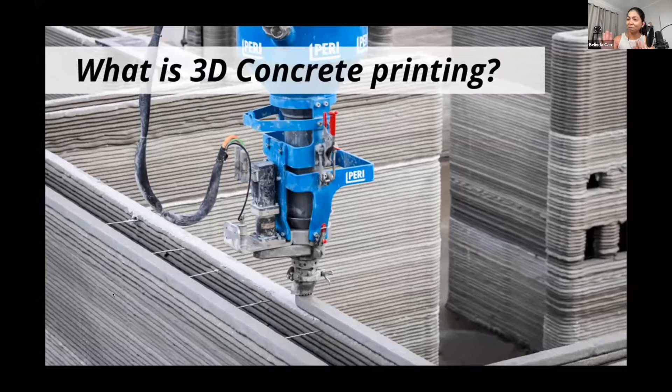A brief, oversimplified intro to 3D concrete printing for anyone who doesn't know what it is. I have a PLA printer here, and many of y'all might have that too. A 3D concrete printer operates in a very similar fashion to a home printer. 3D printing is an additive manufacturing technique—instead of taking material away like a subtractive technique, it adds material, printing layer upon layer to create a three-dimensional structure.

The main steps in a 3D concrete printing process: you start with a 3D model made in some CAD software, whether it's Revit, AutoCAD, Rhino or Grasshopper, whatever you prefer. You come up with this 3D model, then slice it into layers, and convert that into what's called G-code—basically X, Y, and Z coordinates of every point on the wall.

Those X, Y, and Z coordinates are fed to a machine which tells the printer head where to pump out material on a single plane—that's the X and Y coordinates, left or right. The Z coordinate is the vertical direction, telling the printer to move up to the next layer after printing one, and print it again.

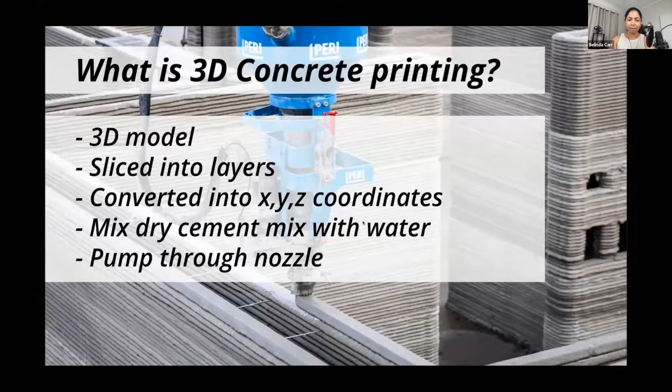So these are the main steps in the 3D concrete printing process. Now, the printer itself, there are two main types. One is a gantry system, which consists of 4 vertical towers that support a horizontal system on top, called a gantry. The nozzle head can move sideways in the X and Y directions, and the whole rig can move up and down in the Z direction.

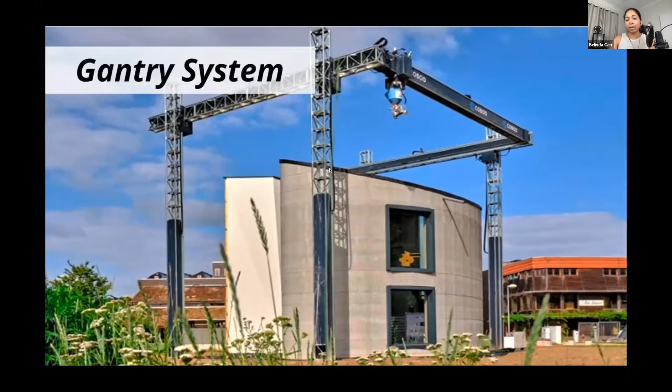The other type of system is a robotic arm, which sits in one location. Robotic arms are used all around the world for all sorts of things, like on cruise ships where they're used to make drinks. Here, you're using the same robotic arm, just with a different head, a nozzle head. And that can move in the X, Y, and Z directions because of the pivot points.

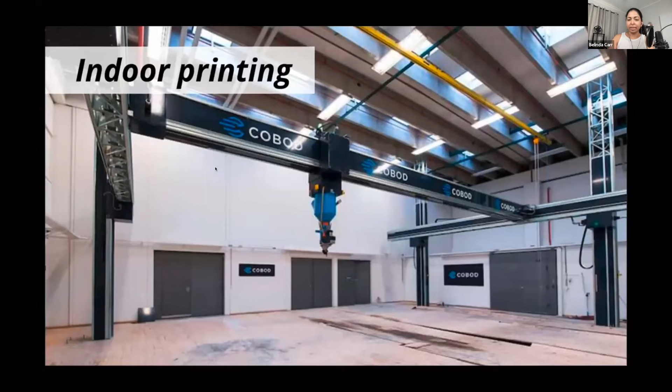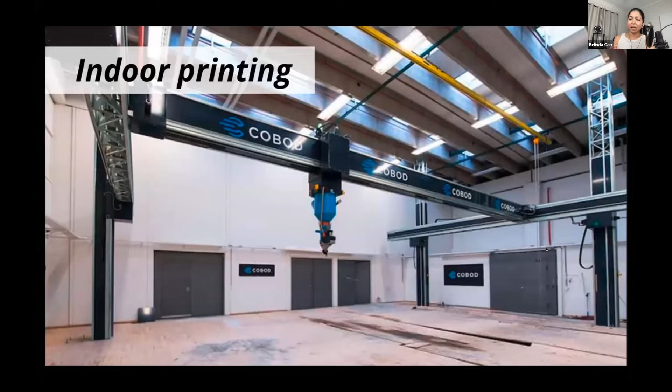3D concrete printing can occur both indoors, in an enclosed facility where you control temperature, humidity, and moisture levels, and outdoors. In the beginning, when people first started experimenting with 3D concrete printing, many prints occurred indoors because you have better control over variables, and mortar mixes had a lower margin of error.

But we've learned a lot in the last couple of years, and we are now able to print outdoors because the mortar mixes are more resilient and can be exposed to the elements. The obvious advantage of printing outdoors is you're saving on transportation costs—you don't have to print in a facility and then spend money transporting it to the site. You're basically printing on a concrete slab, and once the print is done and the walls have cured, it's set in place.

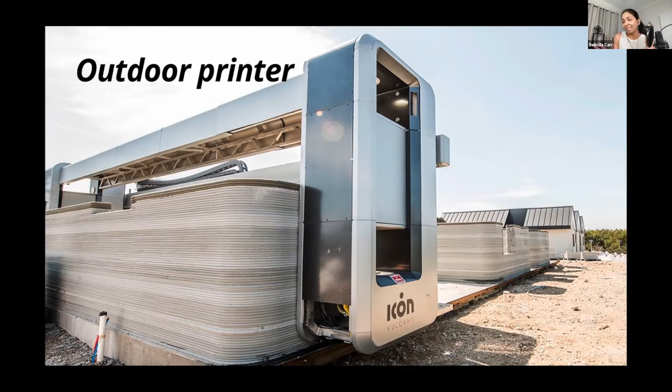All right, let me know if I'm talking too fast. I need to slow down. Belinda, you're fine—your pace is perfect, your content's on point.

Okay, so now this brings us to the second part of the presentation. We're going to go over some common myths about 3D concrete printing, things that I've heard a lot of people regurgitate because of articles that promoted these kinds of myths and hyperbole. One of them was that 3D printed homes can be built for less than $4,000.

This is such a new industry, there are so many variables involved. Every company is using a different concrete mix, and everyone is just in an experimental stage—no one has scaled up. You can't make such claims because they're just unfounded.

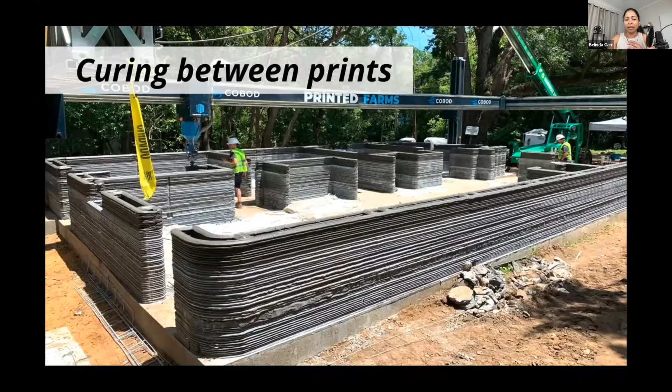If you ever read claims of printing in 24 hours, they are ignoring the setup time to set up the printer, calibrate it once it's on site, and even the curing time, because you can't print all these layers at once. You have to print a couple of layers, wait for them to cure and harden, and then they're stable enough to print the next couple of layers.

So printing time is not the same as the construction time to build the homes. They're two completely different things, and companies should be open about that distinction.

Another myth is that 3D concrete printing will make jobs unnecessary, that it's going to solve the worker shortage and completely eliminate humans on job sites. I don't think that's true, because yeah, you're automating part of the construction of walls, but you're still going to have people operating the machines and monitoring it, people involved in the setup and dismantle, and there are so many other components to building a home, like electrical and plumbing. The printer is not going to automate all the other processes involved.

So this brings me to the third part of the presentation. Since I made that video, I've talked to a lot of 3D concrete printing companies around the world and asked them what they're doing. It's really eye-opening, and it's made me appreciate how much innovation is going on in the field and how hard people are working to figure out the potential of this new technology and what we can actually do with it. Maybe eventually we're not going to be printing homes. Maybe there's a far better application for it, but people are working really hard to figure this out.

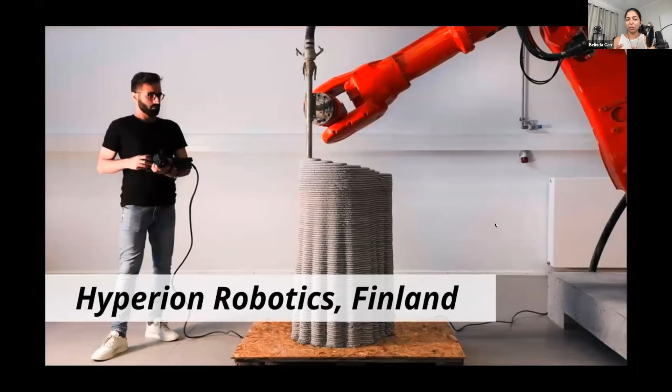Some of the many companies around the world, like Hyperion Robotics in Finland - I think a bunch of really, really smart engineers that have chosen to use a 3D concrete printer for engineering applications rather than architecture. They have no interest in printing homes. They're printing bases for electrical towers, or footings for buildings, something like that. I believe one of their proposals uses like 75% less concrete for a footing, because they calculated exactly how much concrete would be needed rather than just dumping concrete into a cuboidal form and having a solid block. They figured out where concrete was needed and what would be the ideal shape of a footing, and they were able to bring the amount of concrete used down to 25% of the original form.

Another one is Vertico in the Netherlands. Again, really, really smart guys - and when I say guys, I'm including men and women. They're experimenting with different kinds of nozzle heads. What's the next generation? What's the most resilient nozzle head or 3D printed design? They're also experimenting with certain mortar mixes, but I think they're trying to refine the 3D concrete printer and nozzle head itself.

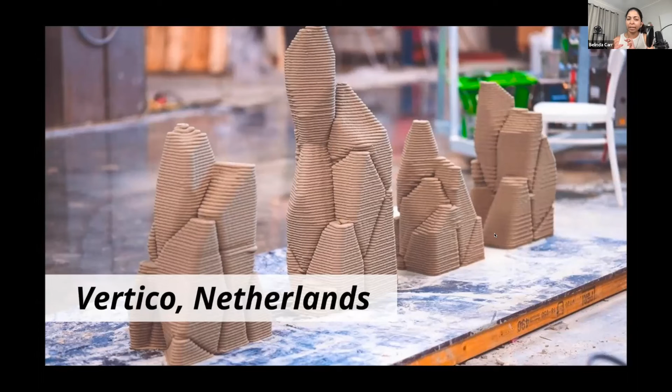And then there's companies like 3D Wasp in Italy that decided, hey, let's experiment and see what happens if we use earth rather than mortar mixes or concrete mixes. They wanted to make something more sustainable, like use a more sustainable mix. And they made these two very interesting domes out of local earth rather than concrete.

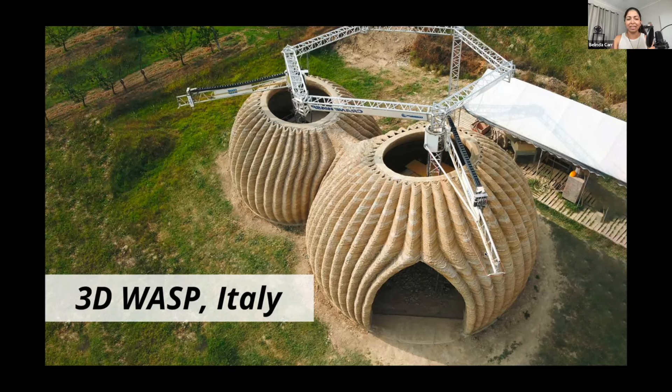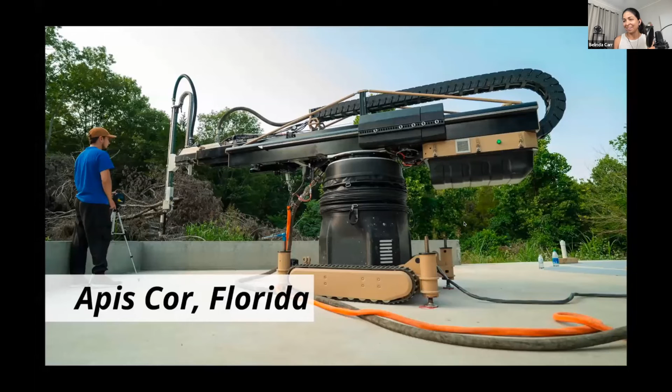And this is a company I recently visited just two weeks ago, Apis Cor in Florida. Really, really cool. They have a showroom in Melbourne, and they have put wheels on their robotic concrete printer. So rather than it being stationary, their idea - you can see it kind of looks like a mini tank.

But of course, it has these supports so that it's stable on the ground. It's not going to move while it's printing. Their idea is that the robotic arm can print a certain part of the building, then drive off to another area and print that other area.

They believe this is a more viable solution in the long run rather than the big gantry system, because they think the gantry system is like when you disassemble and reassemble things, like IKEA furniture, things just don't fit the same way the second or third time. Things get loose, and it's like, how many times can you realistically reuse elements? That's their theory. So they've gone down the path of exploring a robotic arm printer rather than a gantry system.

And of course, there is Icon in Austin, one of the biggest and local 3D concrete printing companies. They have gone down a very interesting path, which brings me to the last part of this presentation. Their prints, and the one word that comes to mind, is just refinement.

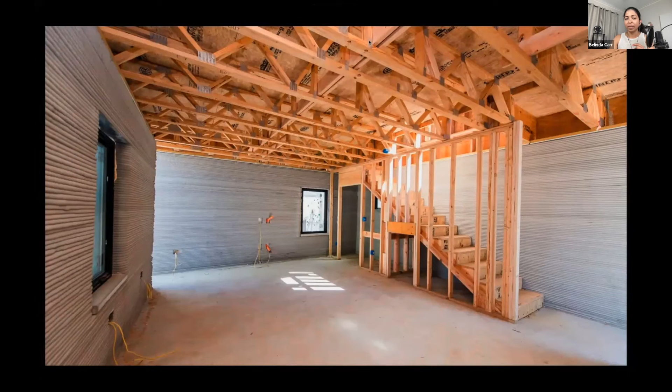This is a home in Austin. The lower part, as you can see, is made of concrete, and the upper part was made with traditional stick building. They collaborate really well with architects and engineers, and they want to come up with something that kind of makes Austin and the inhabitant really proud.

Once you're in that home, you feel like you're a part of history. You feel like something is different. The moment you walk in, it is very polished and super quiet because it's basically a concrete home. And they just take a lot of care in how the home is presented to people. I really appreciated that.

As you can see here, their prints were not as refined as they are now. You can see by the window, it kind of bulges out. There's a lot of things that they have improved. This is their most recent home.

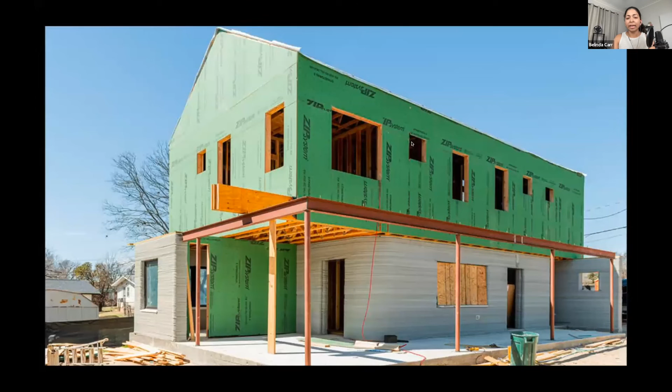I think it's called House Zero in Austin. I haven't visited this one, but there are significant improvements compared to this earlier home, which they printed 1.5 years ago, I believe. Again, they used a zip system, traditional wood framing for the upper floor, and concrete on the lower floor. I'm going to end it with this slide, and then we can have a follow-up discussion.

When I visited this Icon home, they teamed up with a company called Positive Energy in Austin. What I really appreciated is they didn't just print the walls and say okay, we're done, now figure out how the house is going to function. They care about how the houses function.

Positive Energy really cares. The interior designers really cared about what the interiors feel like. Everything was so cohesive and worked so well. It felt like a really polished project. Positive Energy, especially, I feel like they did a really good job with this.

They had an ERV, energy recovery ventilator, so air was constantly being circulated in the home, but it was so super quiet you couldn't hear it. In my home, I've got a 25-year-old condensing unit, and every time the AC kicks on in summer, the lights flicker and you hear this loud noise when the fan starts turning. Nothing like that here. It was eerily quiet in this home. It was so beautifully executed.

I just want to say that we talked about the myths about 3D concrete printing, but this is such a new industry and there is so much research and innovation going on. It is an extremely exciting industry to be in. But I hope that more companies like Icon start teaming up with engineering companies and architecture companies to figure out the potential and start building better.